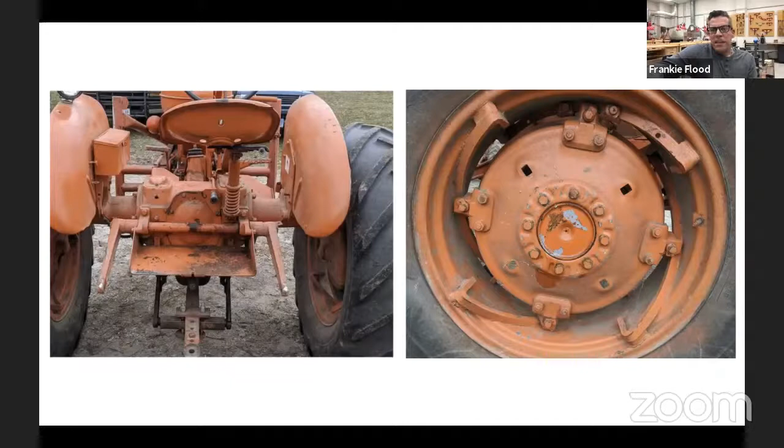Thinking back now, there's a small toolbox on the left-hand side at the rear of the tractor, and I would sit on that toolbox as a little kid as my dad would help my grandfather farm. The smells of that tractor, the way it sounded, the way it looked - there was an aesthetic I was completely drawn to.

That continued as I went through college and put myself through college. I was a first generation college student and worked a factory job, second shift through undergrad, and later in between summers. There was something about working on an assembly line. I worked at a printing factory first, where my father worked, and later at a tool and die and spinning facility - metal spinning, deep draw forming, powder coating, injection molding - where I built things on an assembly line.

Eventually I found myself headed to graduate school. This talk's a little different - I want to give recognition to those that impacted my life. My first was my metals professor in undergrad, David Griffin, and then later my graduate professor, Billie Theide. Billy was a very active member of SNAG and was who first introduced me to SNAG. She started asking me questions, and once I entered graduate school, I'd been making jewelry, and she kept asking me: what is it about jewelry? Really, I came to realize it was function.

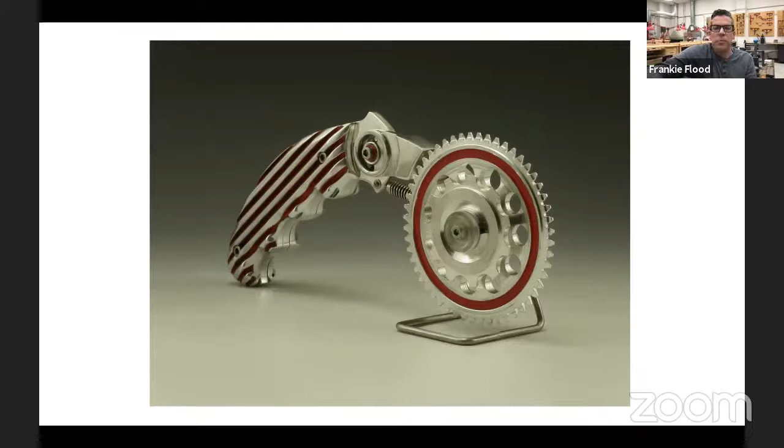I made this first pizza cutter while in graduate school, called Easy Rider, and continued to make more pizza cutters. This was PFL, Pizza for Life. This was kind of a response to being a student and thinking about what's an object that resonates for me. At the time I was poor and eating a lot of frozen pizza, so it just came naturally that this would be an object I would create, thinking about traditions of functional objects within our field.

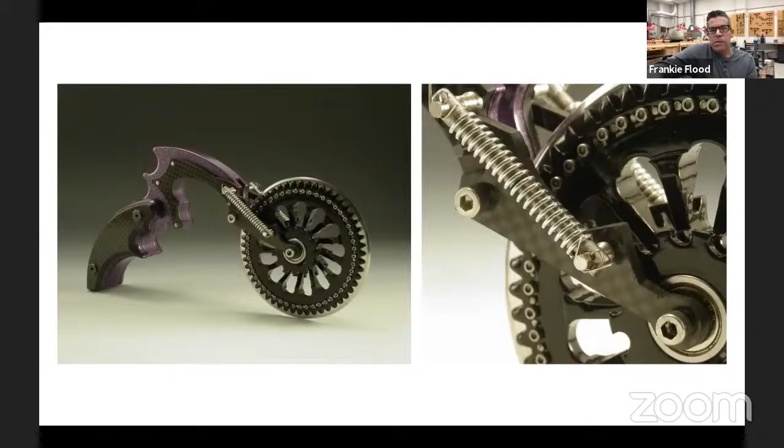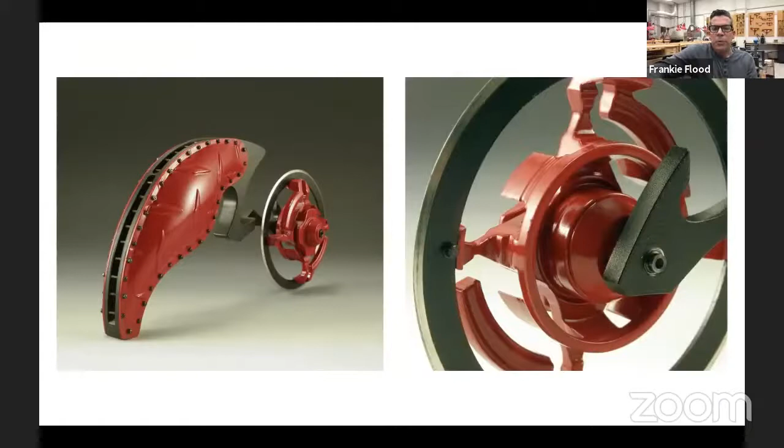This is Fat Boy - it's aluminum, carbon fiber, powder coated. PFL Mantis, another one powder coated in aluminum with a stainless steel blade. This is Psycho Pizza Cadillac, a hubless design - you can actually see through the wheel.

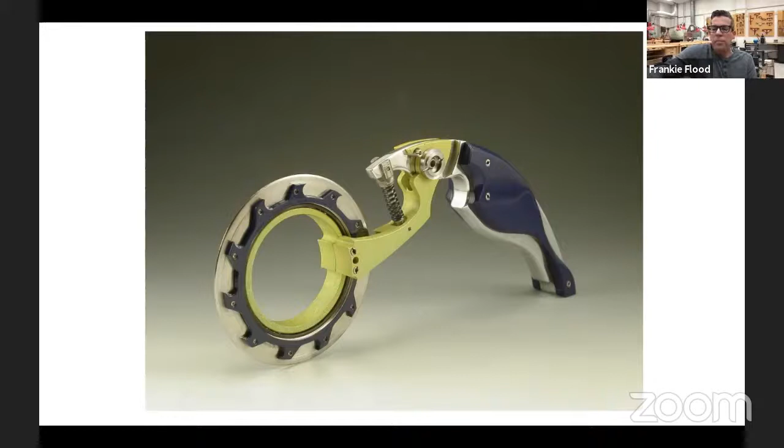This is where I started to make most all of the components, even the small threaded components, myself. I was teaching myself machining and trying to figure out how to scale down industrial processes to my studio scale level. I started powder coating pretty early on, using the Eastwood Company's hot coat system, and experimented with mixing metal flake into the powders and doing things like that. This was a time of extreme growth for me.

A lot of that stemmed from Billie's influence and introducing me to the SNAG world. The culmination of my time at the U of I at Champaign-Urbana resulted in a series of pizza cutters, and then a chopper motorcycle that I built within about a semester and a half.

I got out of school, and during school I had taught, and I really fell in love with teaching - there was something about the sense of community. I was fortunate to have gone to school with some fabulous makers who also influenced me. Brooke Marks Swanson was a huge influence on me. Later, within my cohort, I had Hey Young Suh, Ian Bali, and then Natalya Pinchuk in the cohort behind me. So when I got out, I felt kind of lost - it was like, now what?

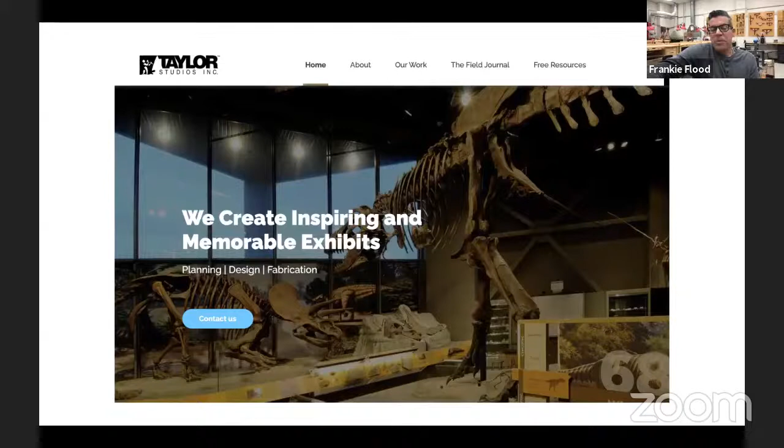I wound up getting a job local to Champaign-Urbana, in Rantoul, Illinois, just up the road, at a place called Taylor Studios. What they did was design Natural History Museum exhibits. I didn't even know this was an option - being able to use my creative talents to create things. I was first hired to be a welder there; they saw the chopper motorcycle and brought me in and asked, can you weld these things? I was terrified, but I also had a child on the way and needed insurance, so I said, yeah, I think I can do this.

We would have to figure out how to move these things into the space, how to break them down, how to rebuild them once we got there. Everything was built in our shops and everything was built from scratch. Every day was a different project, essentially. There was always something new. You never did the same thing twice.

I also did artifact mounts there. Working with the Field Museum, we would be subcontracted sometimes to do work for them. And then we also traveled all over the country to install these. It was a real eye opener. At the time I didn't realize, but I was figuring out ways that I could use my metalsmithing skills and problem solving abilities to make an impact at that company.

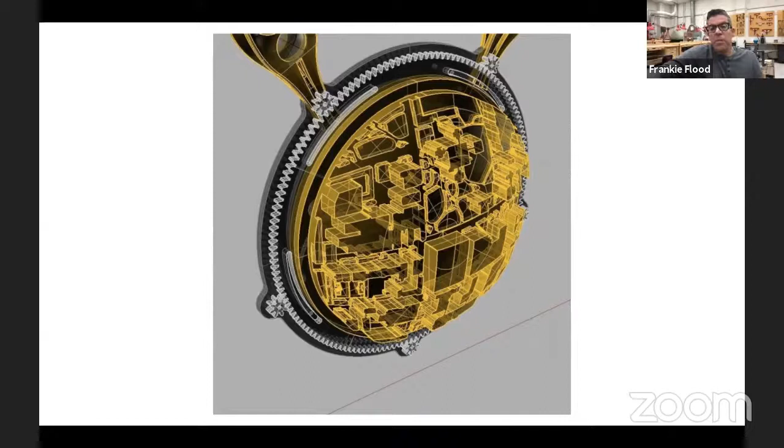The chancellor of the university - we had a new chancellor come, Michael Lovell, and he asked if the art faculty would design a new medallion to be part of the inauguration ceremony he was going to go through. I designed this particular medallion where there was a map of campus that was three-dimensionalized, and you would rotate it, and it would open up this camera iris eye that had the UWM logo, and then his name would be revealed in the back of it.

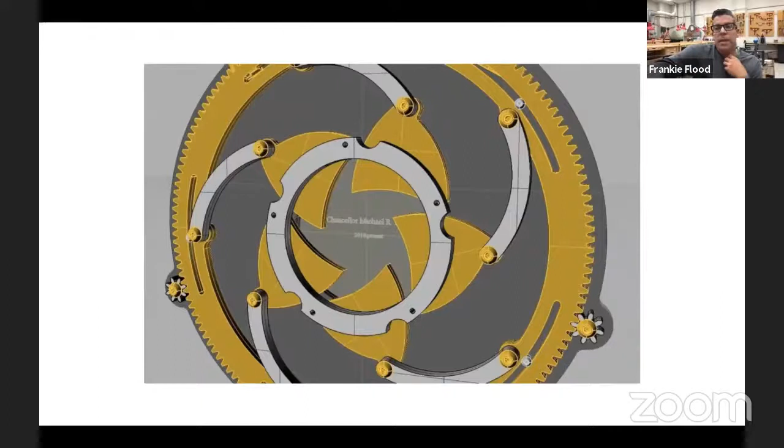We went in for some meetings, and I actually had some CAD models that I'd done ahead of time, and he basically said, yeah, create it. So I did that. We worked with students, Rachel Kettinger, Brian Sarah, Eric Darbo, and again Yev, and we all worked on this to be able to complete this piece.

What was really amazing is that in the creation of this, there was a videographer team that videoed the steps of it, and there's a link to it you can go to later if you want. They actually used that video as part of the ceremony that was done at UWM.

It was one of the times I really felt like, we talk about jewelry having significance and the meaning it can have. It was really an eye-opener to see all these faculty members from other departments, and public officials, including our governor, and to see this object be at the center of the ceremony.

Later on I heard from people like, wow, how cool, how amazing that was. I really felt there was a growing awareness of what was happening within our department and within the school. I was also asked to do the podium medallion for the podium.

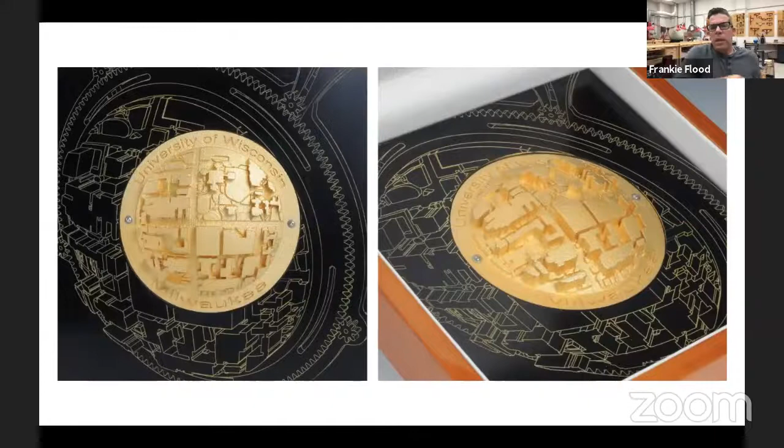That whole auditorium had been remodeled, so I was also asked to do acoustic vent covers for the new building—about 240 acoustic covers. So I was getting tapped for all these kinds of opportunities to showcase what it was that we were doing.

Later on, the chancellor asked me to make donor gifts for anyone who donated $1 million to the university. So I did a series of those based on the medallion, engraved with the donor's name on the back, with a commemorative box.

Again, it was something where I really felt there was an appreciation. A lot of times at universities, the arts get shoved to the side, and people don't really appreciate or value or know what role the arts can play within our world.

That chancellor, Michael Lovell, ended up leaving after about five years. Then our new chancellor came in and asked me again to do a new medallion.

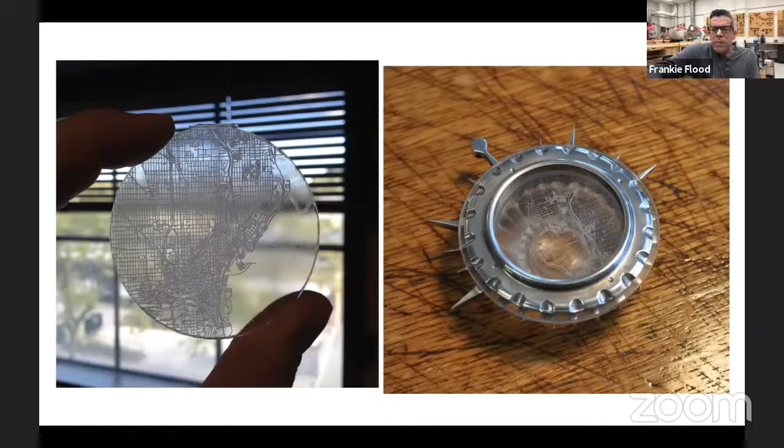This one had a map of the lake shore laser engraved into it, and it became a water chamber where I put water from Lake Michigan. It had a little porthole cover on the front you could take off, which magnified the map through the water. We made that piece, and they also did a video to document the process of it being made.

This is also the current chancellor, Mark Mone, who still wears this at every official function for UWM. During this time, I was also experimenting with 3D printing.

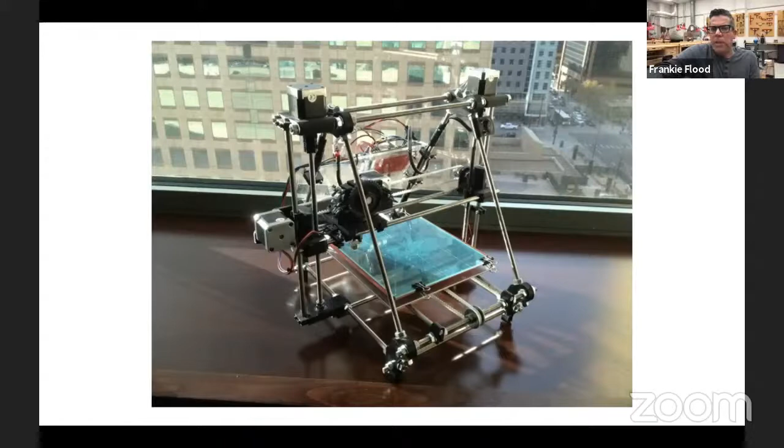I had talked to various members of my faculty and my chair, and was interested in getting into 3D printing and digital technology. There was very little support in the beginning because they didn't really know what role 3D printing would play within our school. So I started building 3D printers.

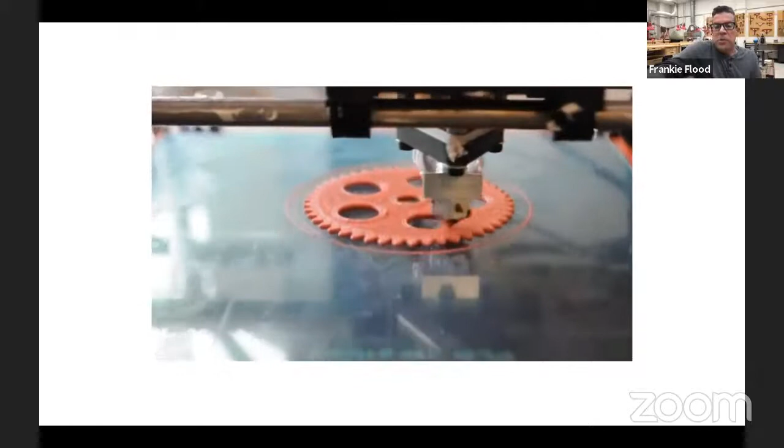There was very little interest, but I started making these 3D printers using open source plans. Another thing I did was start these meetups. In the city, we partnered with Milwaukee Makerspace.

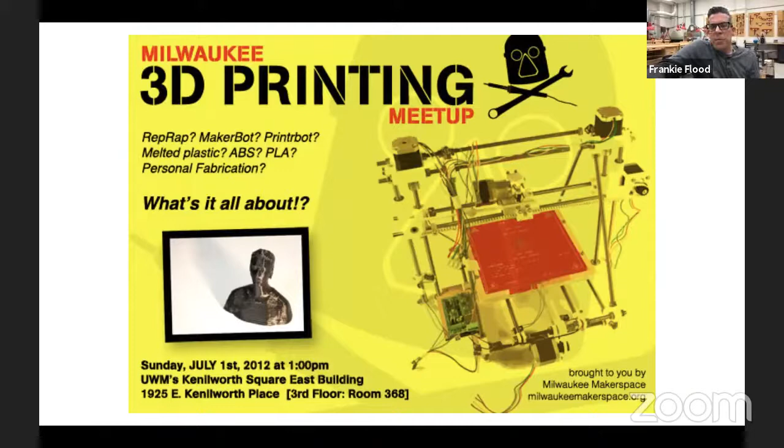There was a maker community really growing at that time. We would do these meetups where people could come up to the lab I'd created, and we could talk about what people were building and share ideas, kind of like those early computer clubs that would start in garages, which Bill Gates and Steve Jobs were members of.

It was a really awesome opportunity to engage with the community outside, so they could come in and see what was happening within the walls of the university. As this activity grew, I started to find there was a broader appreciation for the skills, and purpose within the broader community beyond.

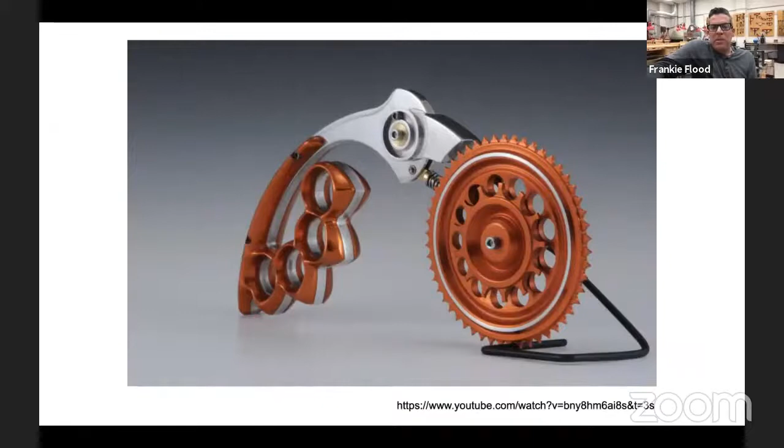I received a message from this individual, Mike Isabella. He sent me an email and said, 'Hey, I got a new tattoo. I just opened up a new restaurant in DC called Graffiato, and I got this tattoo to commemorate it.' He asked, 'Would you make me a pizza cutter?' I said, 'Yeah, I'll do that, but I'll make the handle look a little bit better than the tattoo artist did, if you don't mind.' So I made this pizza cutter for him called Knuckles, and sent it to him.

It was really great to just be able to see it on Top Chef.

He was on this Top Chef show on Bravo, and you could watch the show and see one of your pieces there. It's pretty amazing.

Another impactful moment that happened more recently was connecting with Boris Bally on an exhibition that he organized called Imagine Peace Now.

I have to preface this: 20 years ago, actually it might have been the second conference I went to, I think it was in San Francisco. I was on a gallery crawl with my wife, on a bus going around to galleries, and I wound up running into Boris Bally, Kristen Beeler, Donald Friedlich, and I think Andy Cooperman.

I was young, and I remember meeting them and what an impact that made on me. They were so complimentary, because I had been in an exhibition, I think in Denver, and they'd seen that Easy Rider Pizza Cutter maybe, and it made such a difference in my life.

Again, I think this is important: we never know how we're impacting other people through our actions.

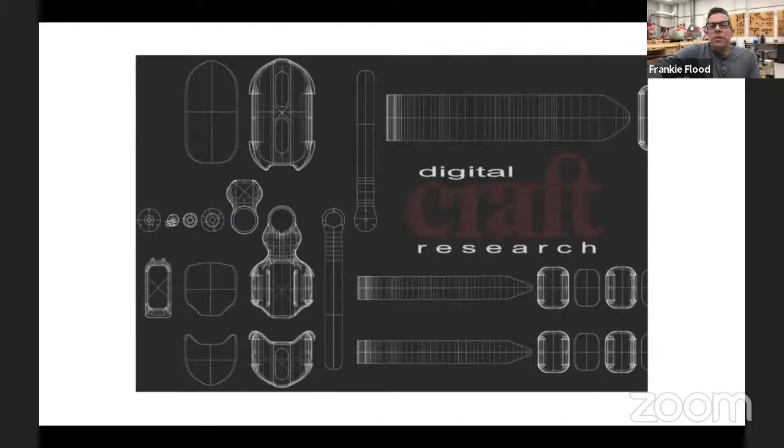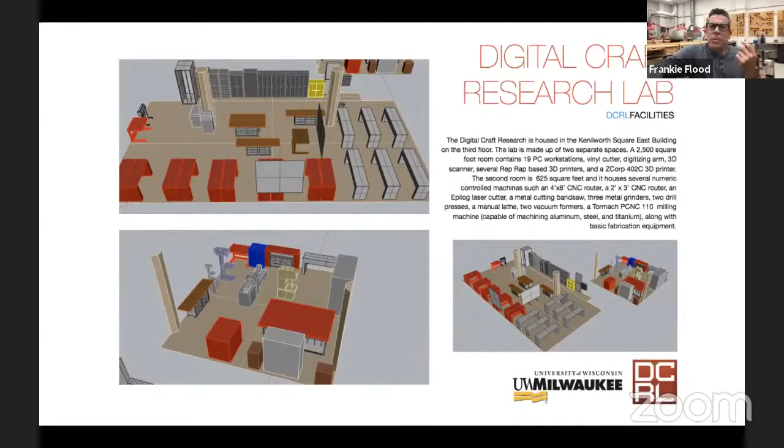This kind of project that I did with my students developed into me starting this thing called the Digital Craft Research Lab, which was about looking at how craft processes can be combined with new technology to solve problems that people may have. This is something I hadn't really thought about as an application within metalsmithing, but how do we solve problems? We're awesome problem solvers—that's what we do on a daily basis. So how can we basically just have people define what their problems are, and they come to us and we help them solve them.

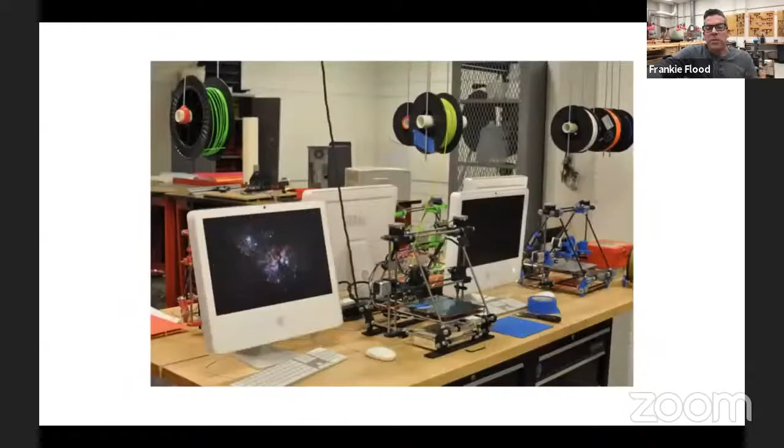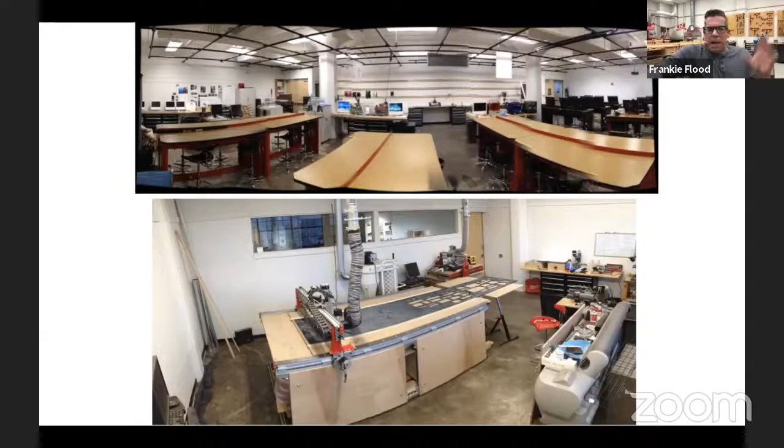So I built this lab that had all this fabrication equipment, both new and old. We had printers that we had built from scratch, and then we had some commercial printers we started building as well. Across the room, we had a CNC router that one of my graduate students, Chad Bridgewater, and I had built from scratch, and then had a milling machine and other equipment across the hall.

Yev was really interested in us expanding the work we were doing. She became chair at that time and said, let's start a digital fabrication and design program. This was a program really looking at how we partner with other entities on campus and off campus.

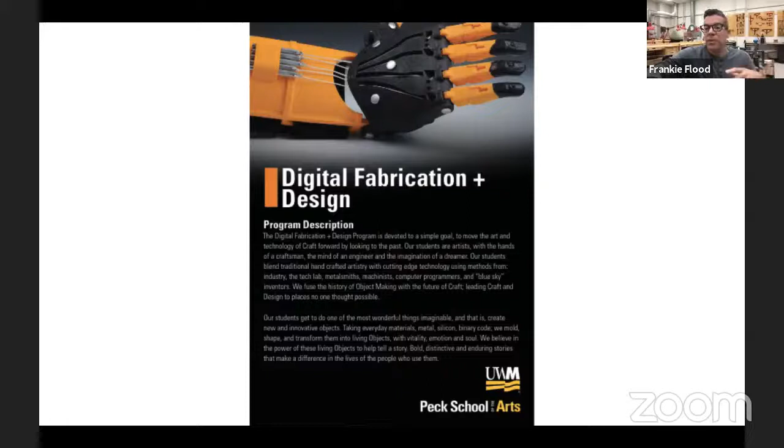We wrote for a lot of grants, received a lot of money to develop this new course of study. I had students that engaged in this—Fred Kames, Calvin Rupnow, Becky Yokshani, and Sarah Schuler—and we started making prosthetic coverings for individuals.

This was part of a Melody America project where veterans were going through rehabilitation due to PTSD, and also their injuries, and then learning how to play a musical instrument. This individual approached us and said, could you start making these fairings that would restore the anatomical shape of the leg, but also be an object of desire—like it would look cool. So we started working on projects like that.

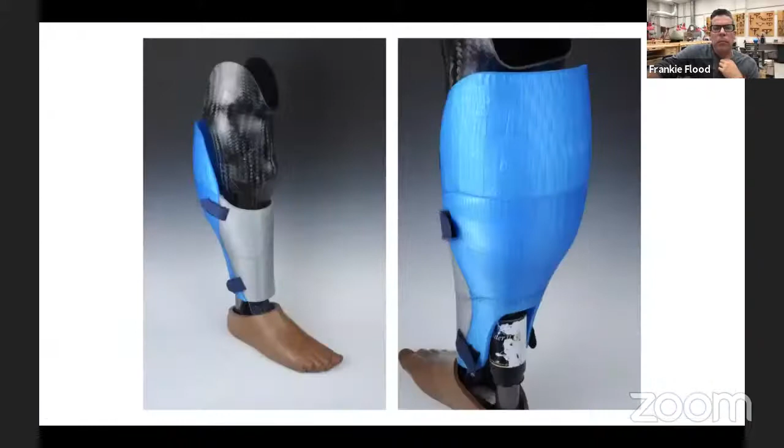There's some details of that.

About this time, I received a message from the Milwaukee Makerspace saying, hey, there's an individual who's looking for a hand for their daughter who was born with a limb difference. So basically this individual asked me, can you help my daughter out? Can you make a 3D printed hand for her?

And I thought, well, this is right up our alley. I was going on sabbatical at the time, and I felt like I could really have a lot of time to work on this and put toward it. And one of my colleagues I talked to, she was in graphic design, Adrienne Blair. She was a close friend of my family's, and we always got together with our kids.

So Adrienne, I asked, will you help me out with this? And she said, yeah, I will. Adrienne had a huge impact on me in the fact that her design process was centered on empathy—looking at how we think about our user and how we can be empathetic to individuals. And Shay's mother, Renee, had seen this project.

It was called RoboHand. Richard Van As was a South African carpenter who had cut off some of his fingers. He developed this hand with the help of an individual named Ivan Owen, who built these kind of cosplay and theatrical objects. The two of them had worked together, and MakerBot had actually done a video on them making a partially 3D printed and thermoplastic hand.

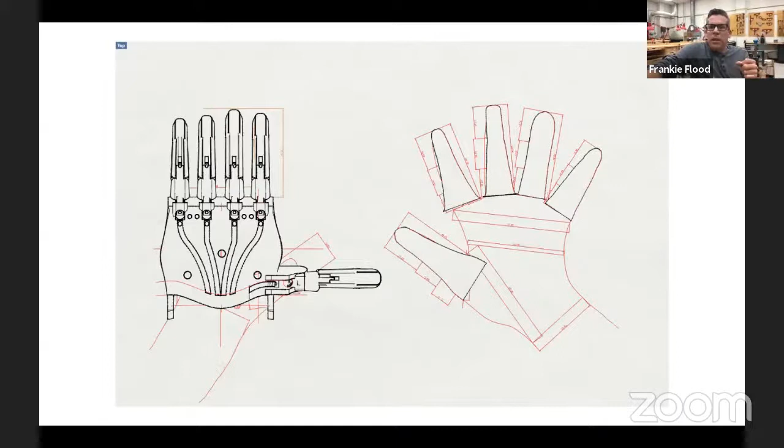You don't need thermoplastic. We could scale it, size it differently. We don't have to worry about issues of hardware and things like that. Can we 3D print all the components?

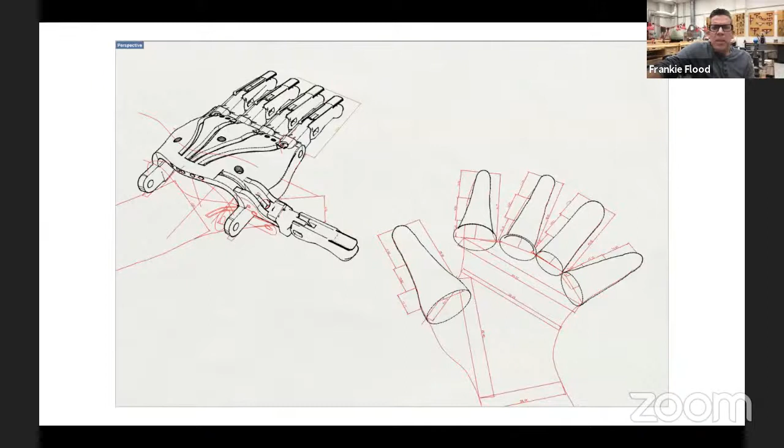And so I would receive these drawings that I would take off of Shay's hand and then transpose them into Rhino and be able to model these hands.

And so we made Shay her first hand, and she came to the lab, the Digital Craft Research Lab, and she was able to immediately put this on and use it.

One of the things we started to talk to Shay about is, can you help be a co-designer on this? Can you tell us what works, what doesn't work, what's uncomfortable? We're also working in conjunction with her prosthetists on how to develop this into something really, really helpful.

Now in Shay's case, she had been encouraged as a kid to just go about life as normal. So the place where she really used the hand a lot was in clamping things, holding something down like a potato to peel it, or being able to grab something maybe she couldn't have grabbed before, but also swimming. You didn't think about being able to tread water and move through the water. It became a useful object in that way also.

And my family, again, at this time, I had spent a lot of time away from family. My schedule at Milwaukee was kind of intense. So while I was on sabbatical, it was an opportunity for my family to participate. A huge thank you and shout out to my wife, Jill. I could not have done anything I've ever done in my life without her. And my kids, them being able to participate in this and engage in making as well.

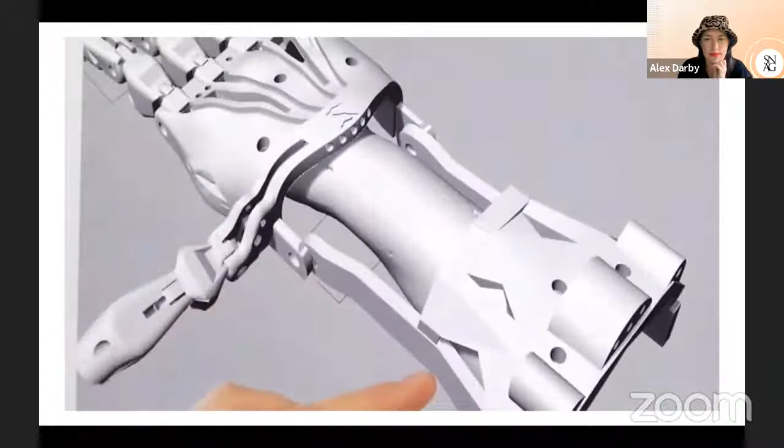I knew that they would come up with better ideas than I could come up with, because that's what our young people and our students do here at UWM. They come up with ideas that are grand, and that brings a richness to the project that I can't, I'm too old in some ways to do that, to have a fresh perspective.

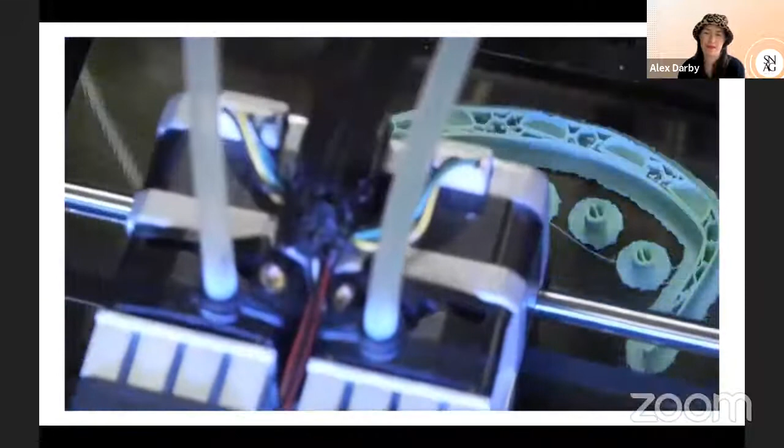None of the students have ever 3D printed, none. And so that entire production process is different. None of them have ever used a laser cutter. So it's a really fun thing to see them all out of their element, but willing to work together and help each other.

There's a Google Plus community called e-NABLE, a group of about 400 members right now. I can talk to people from around the world and download files for it. We had our students join e-NABLE, and almost immediately people I'd be intimidated to talk to would chime in on their sketches and ideas. The students were proud to be part of this, and I think that's really empowering. That rapid pace at which we can develop and research is wonderful, marvelous.

Pull them out and stick them on the finger you want them. I don't think there's a lot of other kids out there who can say they get to be part of making their own hand, give feedback, and have choices. Just seeing her joy, as a mom, that's all you want, is your kids to be happy.

Have you ever seen the laser cutter work? It's pretty fun. They're the ones who can sit here and spend hours and hours away from their family working on stuff. It's just absolutely incredible, leaves us speechless.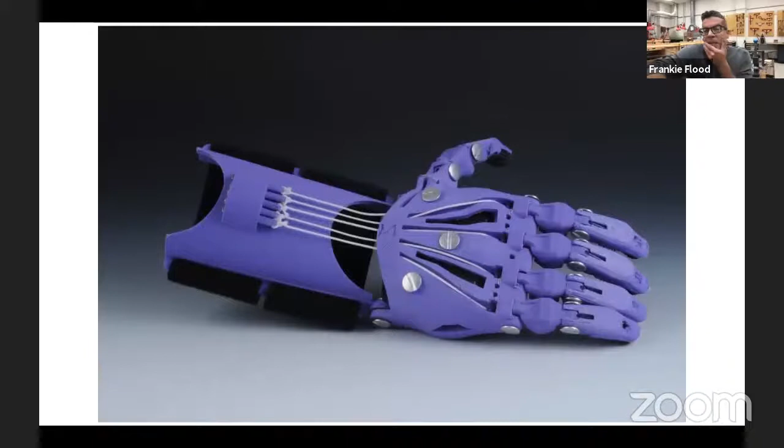All right, so let's see if we can move forward now. There we go. So we continued to develop ideas. I started working a lot on gauntlet design, this back section of the hands, trying to develop more comfortable designs.

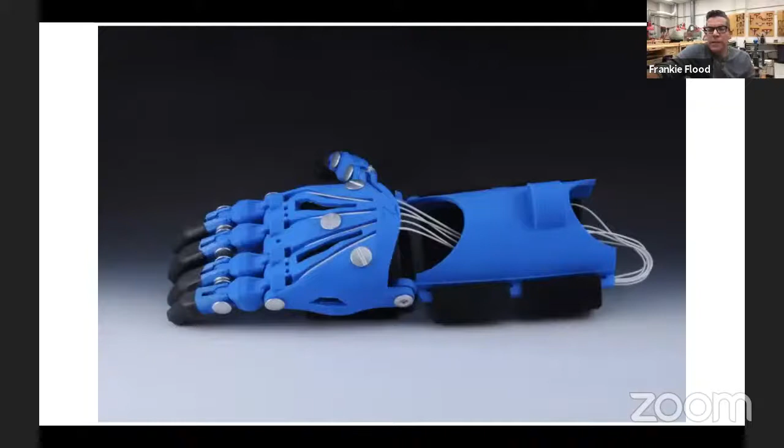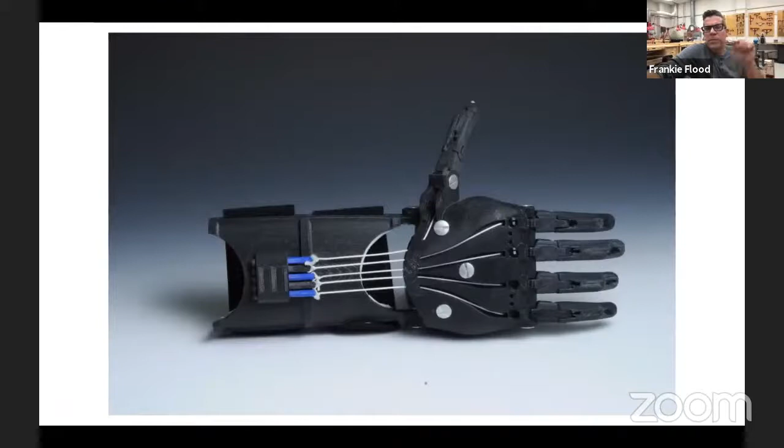Shay's class came to our studio, and we had kids raising their hands saying, I want a hand, and they didn't need a hand. They had two functioning hands, and we realized something was happening here, that what some people would see as different was now something everybody else wanted, and it was really touching in a lot of ways.

I started to realize that, wow, as designers, as craftspeople, we have the ability to create things that are useful, and we can do it for one person, and that can have an effect. Throughout the conference, people have spoken about how one person can affect change, and it was a real eye opener. I hadn't thought about my profession that way up until that point.

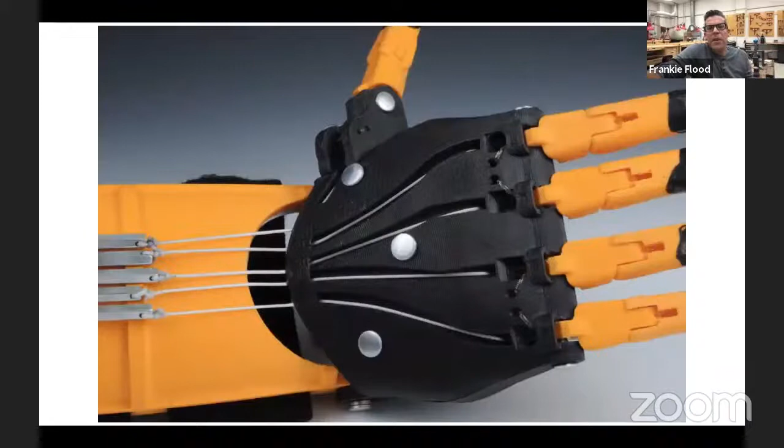It was due in large part to my colleague Adrienne Blair. Like I said earlier, Adrienne passed away a couple years ago, so I'd like to dedicate this talk to her, because she taught me that. Sorry.

So the group Enable grew and became a global community. People were participating in the design and building, but also people were asking from all over the world for hands, and there were just a few designers working on this. I received a package from a little girl in Inverness, Scotland, with a drawing and a little pink plaster cast.

And this is Haley. Hi, I'm David Fraser, I'm from Inverness. This is my daughter Haley, who's 5. She was born with brachydactyly on her left hand, with little stumps instead of full-grown fingers. Earlier this year I got in touch with a chap called Frankie from the University of Wisconsin in the United States, and he kindly made a 3D printed hand for Haley, free of charge.

As Haley was born with her small hand, it's never stopped her doing day-to-day tasks. However, with her new prosthetic hand, she can pick up heavier objects such as fruit or teddies, and it also gives her counterbalance when she's riding her scooter.

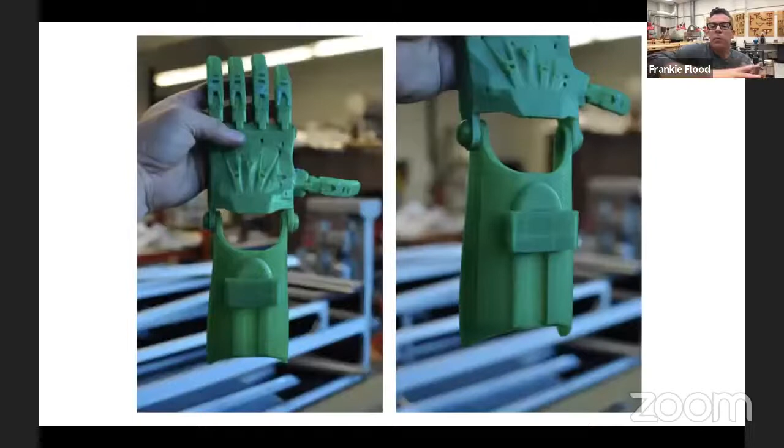I started to engage more and more with collaborative handwork, designing hands with Andreas Bastian, Peter Binkley, and Ivan Owen. Eventually we decided to have a team led by Jeremy Simon that would build the official Enable hand, the organization I was a member of. I was tasked with making the 3D printable hinge pins, so we weren't having to use hardware from the hardware store, thinking globally that if you could print everything on the printer, that would be very, very helpful.

So I worked on the gauntlet, the tensioning device, and those hinge pins. Ivan worked on the fingers and Peter on the palm, and Andreas worked on bringing everything together with us.

And we developed this Raptor hand, and we were asked to come to the Johns Hopkins conference on 3D printed prosthetics. We sent this design out into the world for free and said, basically, everyone scale this hand at varying levels of size, then print them and send them to Johns Hopkins.

We'd have an event where we would talk about the research we were doing. This was organized by Dr. Albert Chi, and we could present the work we were doing, then have a hand building event where I basically used my camera on my computer to show families of children who had limb differences how to build their own hand.

Our hope was, because we were getting so many requests for hands, that if we could start to train these groups of people within their communities, they could share with their network of people who also had children born with no fingers. This was a fabulous event. I took my student Kayvon, shown here, and we basically had a room full of families building these hands, and the children got to participate in making their own devices.

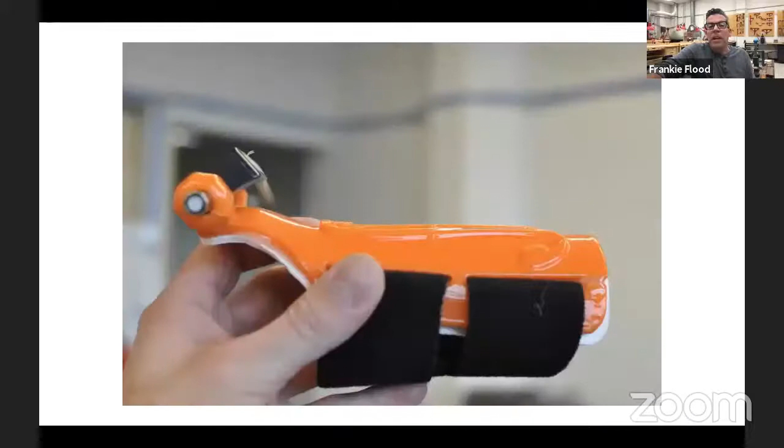We continue to make adaptive devices, and as Shay grew, she wanted to be able to play viola, so we made a bow holder for her. Again, it was an opportunity to develop these devices.

Oops, I ran that too fast. But anyway, I know I'm running on time here. So, I'll just do that—we'll go ahead forward.

So we would adapt this and make adjustments to it as Shay needed. And then one of my graduate students, Caitlin Driver, developed an adaptive trumpet device for Karuna when he learned to play trumpet. She made a device that he could keep on his trumpet in its case, so we could store it.

And then he was able to use this at school. It's a dovetail on that—you slide it together, and then you can hold it up to position.

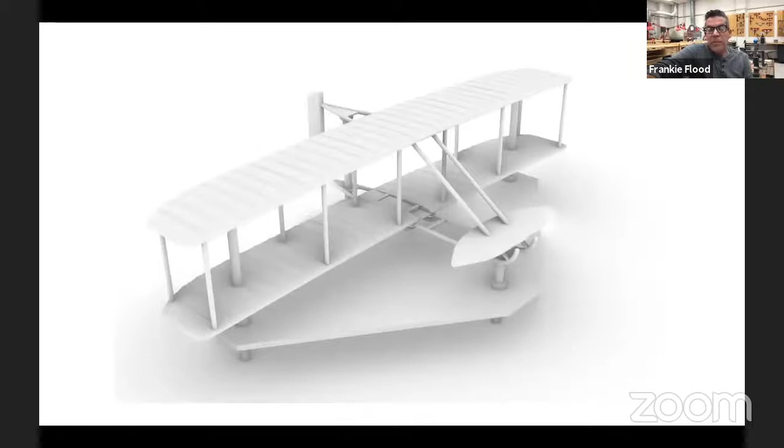So recently I just finished up a body of work—these are high-touch models for a prominent museum. I'm not able to disclose everything right now, but there's a museum being remodeled that's going to have some scale models of airplanes. These airplanes are CNC machined and then welded and fabricated so that viewers can come to the museum and touch these objects to actually sense what the design is. Visually impaired individuals could approach these, and they're meant to be interacted with as objects that help describe the actual plane on display, if that makes sense.

And again, I'm just astonished at the ways in which I've been blessed to use my abilities and my skills and the things I've learned, and the influences I've had from my mentors, my students, my family, and how it's allowed me to find communities that I can use those skills to engage with.